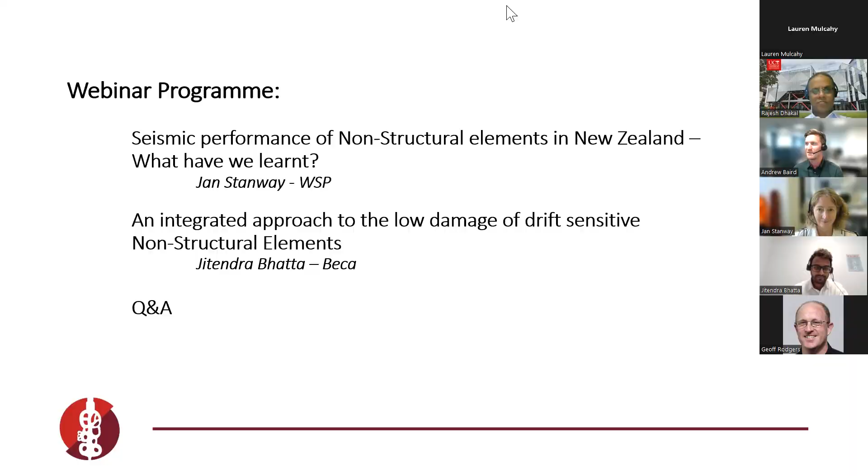My presentation today is on seismic performance of non-structural elements and what we've learned. I want to run through briefly why the seismic performance of non-structural elements is important, what were the main causes of damage, and what are the key issues facing the construction industry that impact this. I also want to talk about the impact of the performance of the primary structure on non-structural elements, and what can be done to improve their seismic performance.

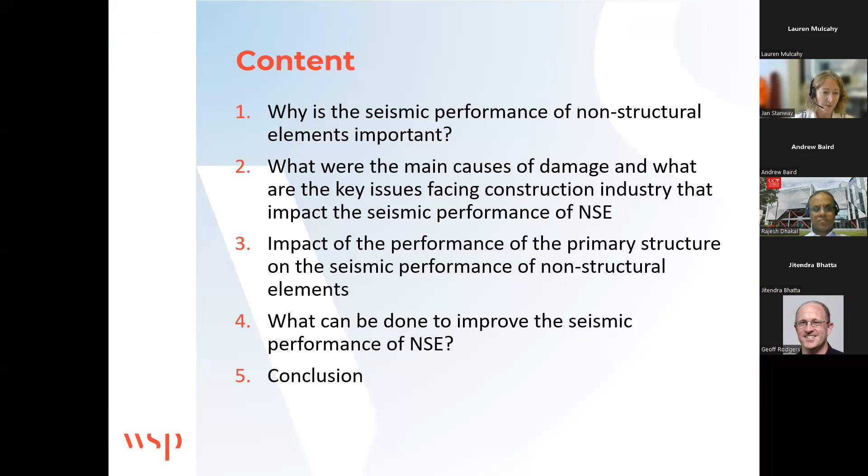So starting out, why is it important to have good seismic performance of non-structural elements? Well, non-structural elements typically contribute to about 80% of the total cost of the building. And we had extensive damage to non-structural elements in the Canterbury earthquakes, the Cook Strait earthquake up in Wellington where accelerations weren't as high, and the Kaikoura earthquake.

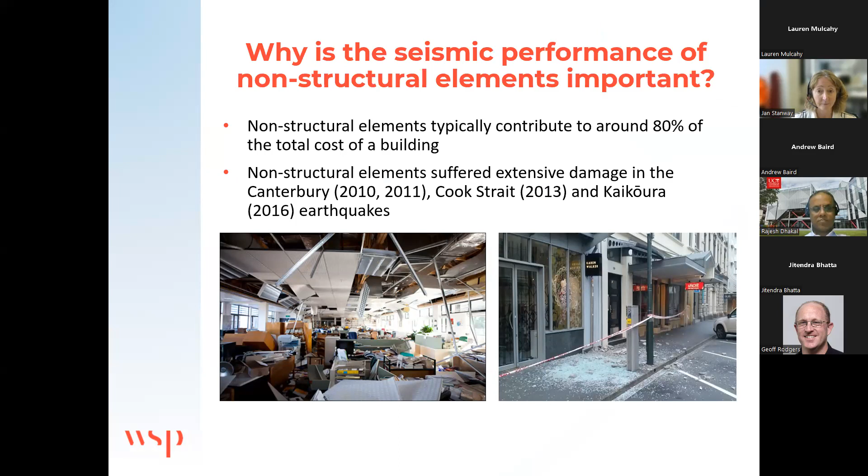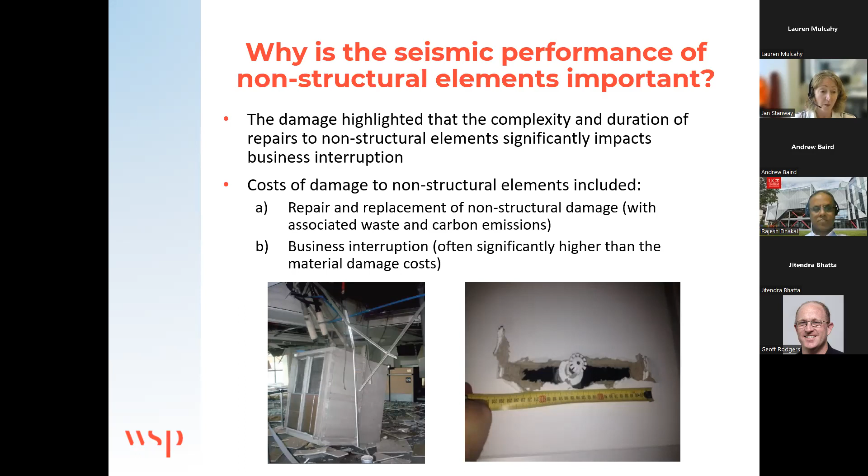The damage we observed highlighted that the complexity and duration of repairs to non-structural elements significantly impacts business interruption. The costs of damage are twofold: firstly the repair and replacement of non-structural elements, but importantly business interruption can't be forgotten, because in most cases it was actually a significantly higher cost than the material damage costs, where businesses couldn't go back to their offices immediately or had to remove themselves to enable the repair or replacement to be undertaken.

Did I zoom past? Sorry.

So what have we learned? That good seismic performance of non-structural elements is important, but not just for our hospitals and post-disaster facilities. It's important for our homes, our apartment buildings, our office buildings, our industrial buildings, and our transportation links, because the ongoing operation of those buildings is essential for the continuation of our economy and the well-being of our communities.

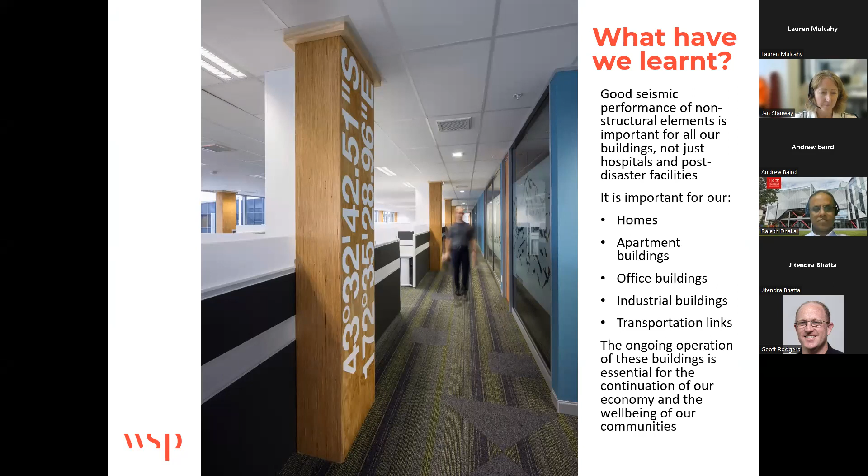So what were the main causes of damage and the key issues facing the construction industry?

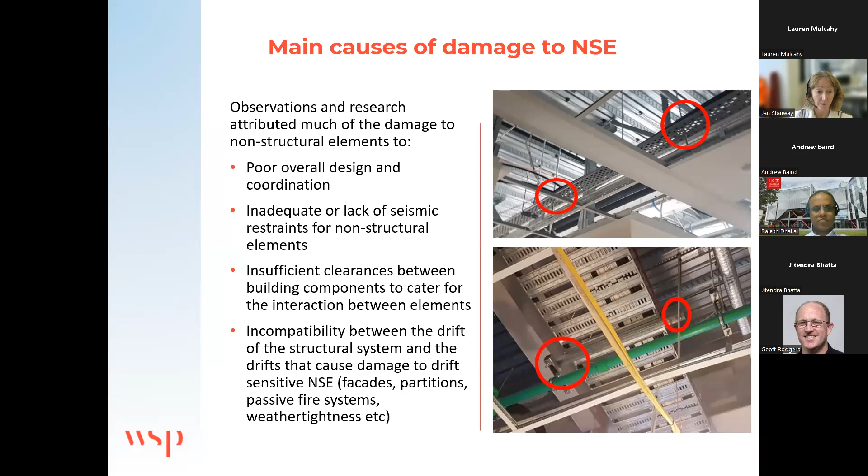The main causes of damage were poor overall design and coordination. We saw a lot of places where there was inadequate or lack of seismic restraints for non-structural elements, insufficient clearances between building components to cater for interaction between components, and incompatibility between the drift of the structural system and the drifts that cause damage to drift-sensitive non-structural elements—your facades, cladding, partitions, your fire systems, your passive fire systems, and your weather tightness.

The Building Industry Partnership did some research back in 2020 and found there were underlying construction industry issues causing the poor performance observed during the earthquakes. The key issues were found to be procurement, where procurement methodologies push the risk down the chain to the contracting teams, and that risk is then poorly managed throughout the project lifecycle.

We found there were limitations in knowledge, particularly among clients, about what they were going to get if they chose code minimum performance compared with resilient options. We found poor holistic design and coordination between the design disciplines from the start of projects, poor coordination between subtrades on site, and installation behaviours driven by lowest price conforming tender processes, resulting in poor outcomes.

We also found there's a lack of knowledge, skills, and training throughout the industry. And last, but certainly not least, there was a lack of independent QA.

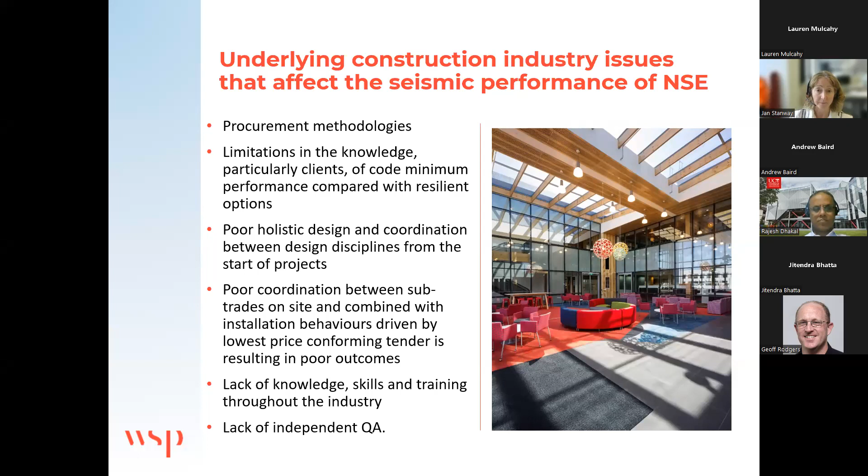So I want to talk briefly about the performance of the primary structure and its effects on non-structural elements. From the concept phase, the design of the primary structure should be completed to achieve the drift limits required for the performance of the non-structural elements. I've made some notes on things that should be considered by structural engineers.

They should be thinking about what's in this building. Are there partitions? Are the partitions full height, or do they stop at ceiling level? Do I have firewall partitions? If so, is the intent that they run from floor to floor, or to the underside of the roof? Or is there an intention to have fire rated partitions run just above ceiling level, with a bulkhead and fire rated seal coming down from the top to create the firewall? In each case, what detailing will be required, and what costs will be required?

Noting that damage to partitions can initiate at around 0.3% drift.

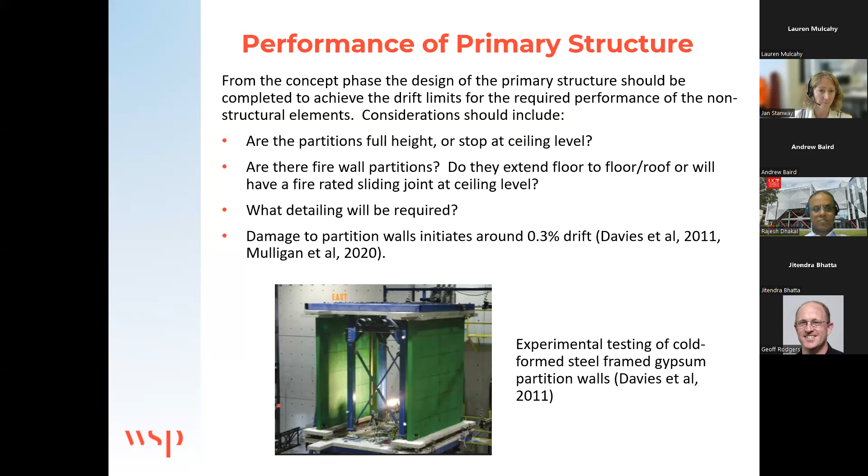Also to be asking, what's the cladding system? And for that cladding system, what's the drift limit for the initiation of damage to the proposed cladding system? Some work done at the University of Canterbury by Arifin and others in 2020 was on a commercial glazing system, and found that you can start to lose water tightness at a median drift of 0.35%.

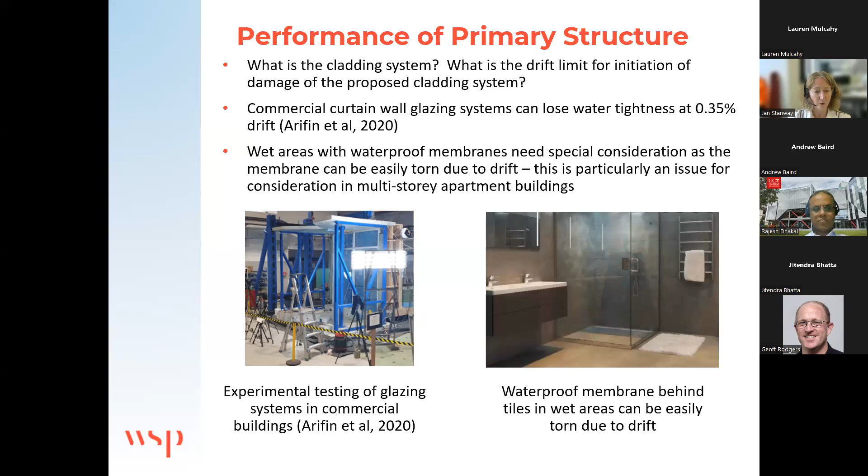When you've got multi-story apartment buildings, you often have tiled wet area showers with membranes in behind. That's particularly an issue for drift, where in the corners, the membranes are actually very vulnerable to being torn under drift.

My key point here is that the design of the primary structural system needs to achieve the seismic performance of the non-structural elements. When it's holistically considered, the most cost-effective overall solution will be found. Let's not design the structural system and then get way down the track to find we've got to implement expensive detailing on our non-structural elements to get the performance we need, and overall we haven't necessarily found the most cost-effective solution. I'm really advocating for holistic consideration from the start of the project.

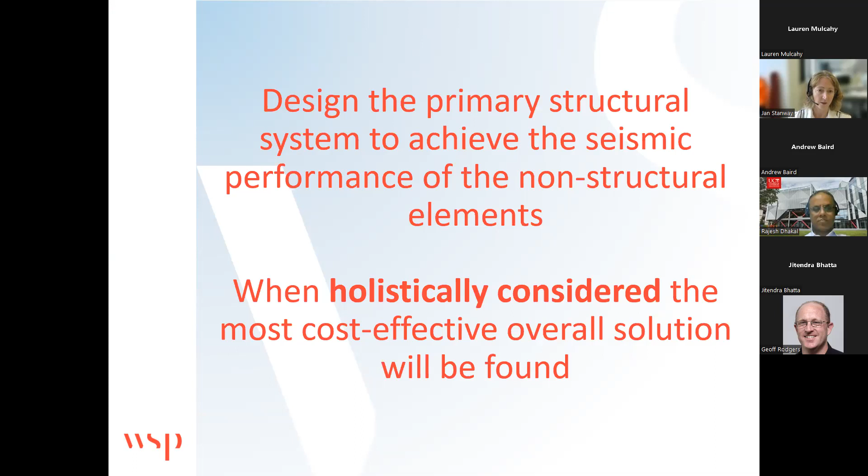Other things to be considered with the structural design are often lightweight roofs, which in standard is good value to have cold form purlins supported on optimized steel rafters and portal frames. However, it needs to be discussed with the building services team if there are going to be plant and equipment suspended from the roof or loaded onto it, and what gravity and seismic loads the roof will need to resist. We don't want to get into a situation where down the track they then need to install secondary structure, which often ends up costing more money and potentially causing not just budget overruns but program overruns.

Also to be looking at the floor system, and does it have sufficient capacity for those localized hold downs for plant and mechanical and electrical equipment? Also just thinking about larger sized filled water pipes, which have considerable weight - where are those components going to be resisted to, and where's the restraint going to come from? Just thinking through those collaboratively so that solutions are being chosen and thought about during the design.

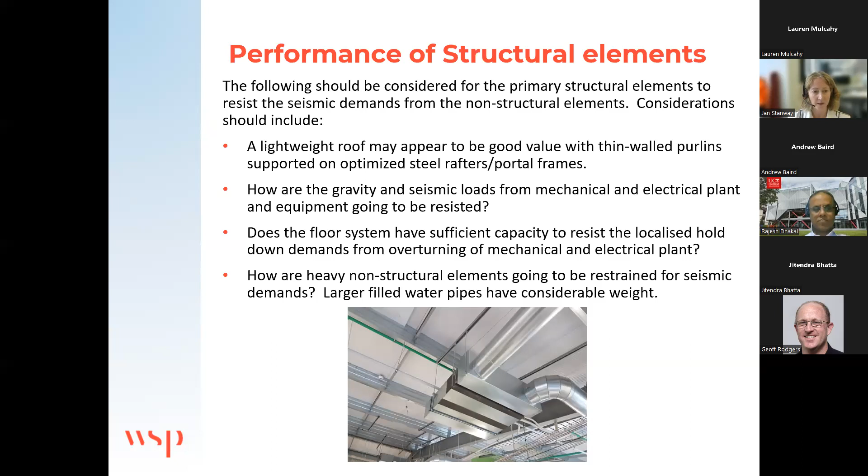Also briefly, I want to talk about consideration of the post-earthquake performance. This isn't just to be considered when you're doing post-earthquake inspections, but when you're doing the design, to be thinking about in an event that's not a ULS event, what do I want my post-earthquake performance to look like?

Just to note that structural damage can materially reduce the stiffness of structures. Reduced stiffness equals increased drift. So we need to be thinking about whether the drift-sensitive non-structural elements are going to be more vulnerable to damage in future earthquakes. Then thinking about the repair methodology for the primary structure, that must consider the future seismic performance of the non-structural elements, not just the structural performance of the primary structure to achieve life safety.

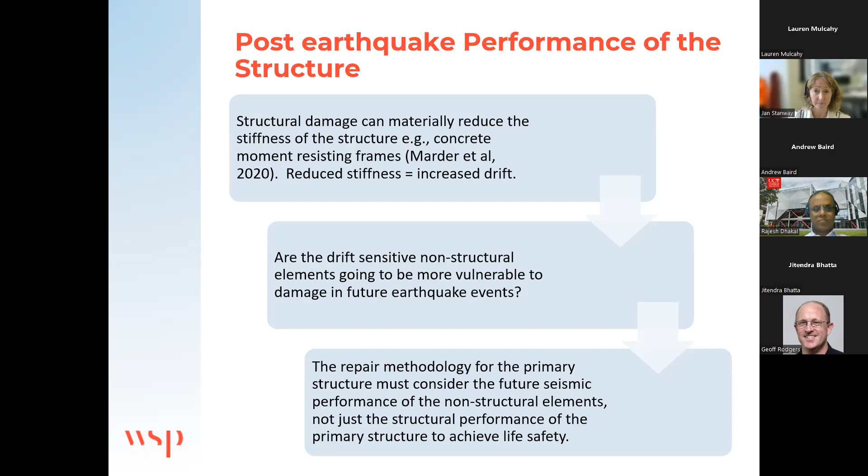I also want to briefly talk about residual drift, where residual drift of the primary structure can actually cause or present some unique challenges for restoring earthquake damaged buildings. Here I've got a window which you can see, and you probably can't see, but there's a 0.5% drift on this particular building, and it's meant that there's a gap between the frame and the window, so air can come into that particular room.

Not only that, the actual frame has been damaged, and there's water ingress, so there's water tightness issues. Not only that, there was damage to the plaster cladding, so replacement of the cladding in the window system needed to be undertaken. However, because the building's got a 0.5% drift, if you tried to install new windows into the window frame, which has now got 0.5% drift, you're likely going to get the same issue where your windows are going to have gaps, and you're potentially going to damage your windows by putting them in in the first place.

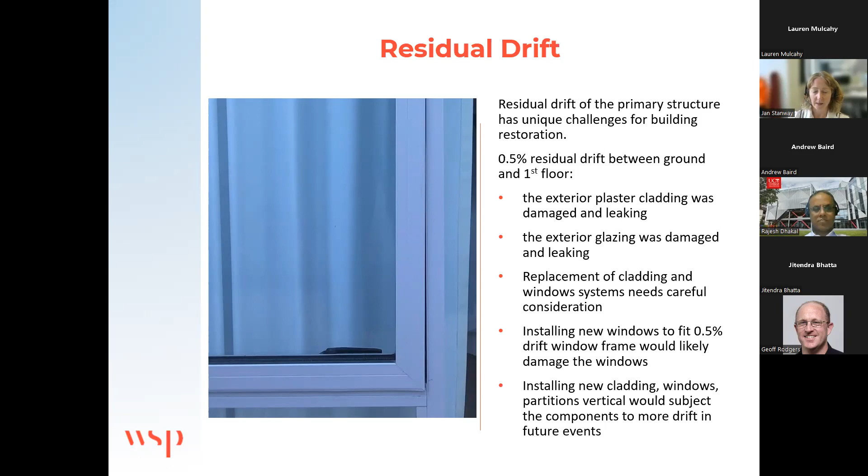Of course, the perhaps suggested option would be to install the windows, new cladding, and new partitions vertical. However, you just got to be mindful that at the moment it's sitting at 0.5% drift. And if the building moves the other way to 0.5% drift, if the non-structural elements had been in their original form, they would have only seen 0.5% drift in the other direction. However, these new components being put in would have seen 1% drift, which makes them significantly more vulnerable to damage in future events.

So I just want to go into a section on what can be done to improve the seismic performance of non-structural elements.

As I've mentioned, I really want to highlight holistic building design and coordination across all of the design disciplines, and that following through into the construction phase, so that the primary structure is designed to achieve the seismic performance of the non-structural elements, in particular the drift-sensitive ones—your partitions, firewalls, and cladding systems.

In some cases you're going to have design build for non-structural elements, and that's fine. However, the design team must work together to solve the challenges during the design phase to make sure there's sufficient room within the context of the building for the final design and coordination of the components by the contractor during the construction phase.

Also, I want to put it out there as an option to potentially consider modularization. Can the in-ceiling services be modularized and constructed off-site with structural support frames, such that the completed sections can be brought to site and fixed to the building?

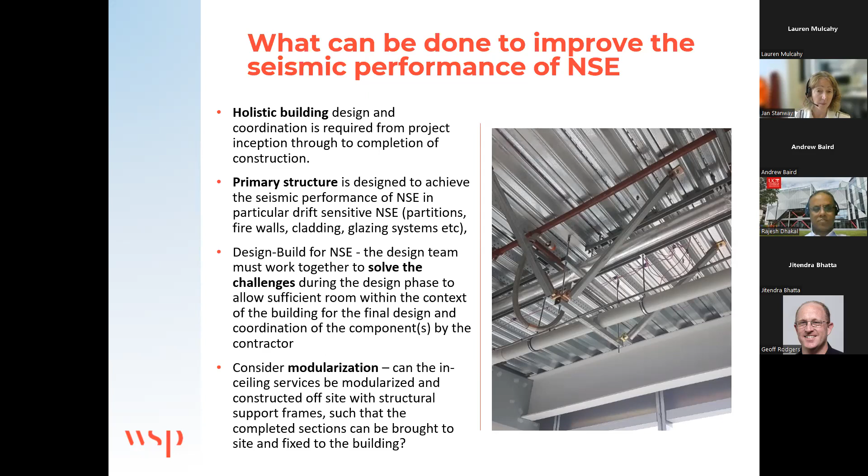I recommend one entity is given the responsibility for the installation and on-site coordination. So they're not doing all the installation, but they've got responsibility for the on-site coordination of all the non-structural elements, including particularly those in the ceiling void—your ceiling hangers, building services, and seismic restraints for all of those, including any restraints for your partitions.

You want to ensure sufficient coordination has been done in the design phase, and when the contractor comes through and does their overlay for any design build components, such that if the contractor provides or suggests product substitutions, they can be well considered before approval is given.

I'm aware of many instances where it appears a significant saving is available. However, the knock-on effects are not well known, such that you actually end up with budget and program overruns from approving a particular product substitution, because there wasn't sufficient coordination done—it wasn't foreseen that this was going to be an issue.

And last, but definitely not least, independent inspection and QA sign-off—if we can get that to confirm that the installation is not only code compliant, but actually meets the performance expectations for the project.

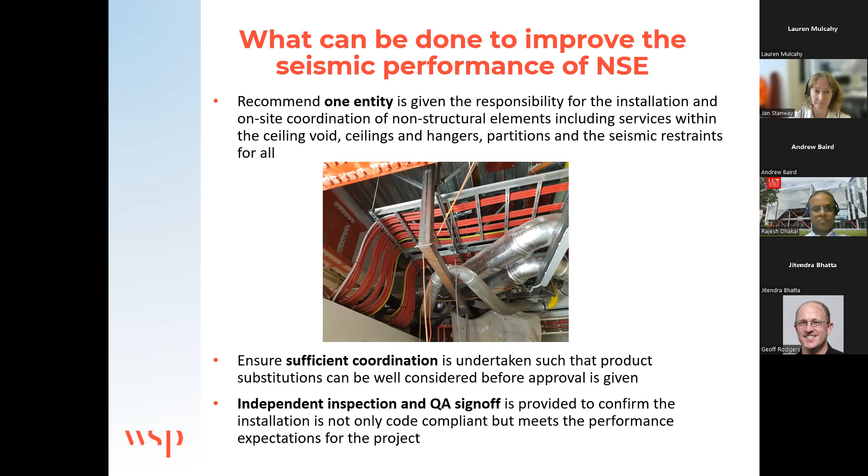Just got a few more slides here to highlight some specific areas for consideration during the design.

Choose an appropriate ceiling void depth. Don't skimp, because if you have too small a ceiling void, it can make the restraint services installation and the restraint installation complex and challenging. However, be very wary of large ceiling voids too, because they have their own complexities and difficulties.

When using metal deck concrete floor slabs, be aware how many partitions and firewalls you've got, because the trapezoidal profile you can see on the left can actually be really challenging and expensive for the contractor to connect to and seal firewalls to. Potentially, if you've got lots of partitions, having a flat soffit profile deck may be a good alternative.

You want to ensure you're using seismically qualified post-installed anchors, and be mindful that there are a number of anchors with limitations on their use in the soffit of metal deck concrete floors.

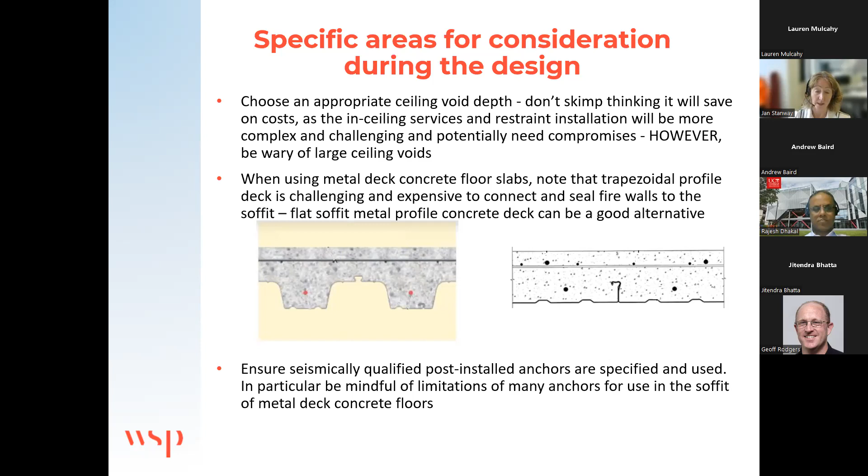You want to specify and use seismically rated acoustic vibration mounts for plant. The next consideration is thermal expansion of heating pipes, hot water pipes, steam pipes, and chilled water pipes. Need to make sure that any seismic restraints being designed and installed do not compromise the thermal expansion requirements—we don't want to compromise the functionality that's going on day in, day out by virtue of putting on seismic restraints.

We want to ensure that hanging points for anything we're putting on are actually certified for the restraint loads that are expected. Just to note, folded sheet metal ducts are often fabricated from very thin sheet metal.

You want to be coordinating fire dampers and firewalls, the penetrations through your partitions, with the fire engineers and the building services team, and potentially the architect as well. Fire dampers are installed in the wall, and the duct going through is hung from the slab above.

You need to make sure there's compatibility of movement between the duct and the partition wall drift, so the duct does not prevent any breakaway. Also make sure that any restraints you put in adjacent to the breakaway joint don't stop the breakaway joint from doing its job in a fire and actually breaking away.

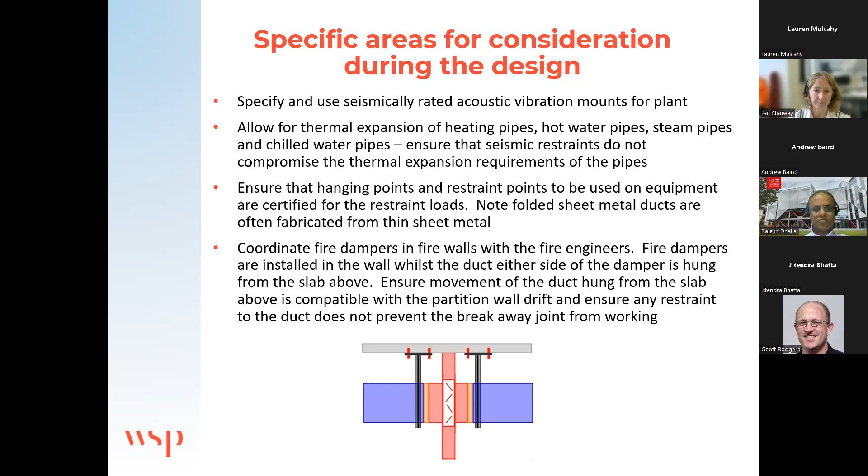You want to have appropriate flexible connections on mechanical plant and use flexible sprinkler droppers. And the last point, you want to coordinate with a fire engineer for passive fire elements, and also talk to the architects as well.

Currently there's a lack of testing to validate the post-earthquake performance of a lot of passive fire systems. Some fire stop systems inherently have good fire stop performance in a seismic event because they're already seismically isolated or restrained as part of normal design. But please, if you're doing any work in this space, make sure you coordinate really well with the fire engineer and architect.

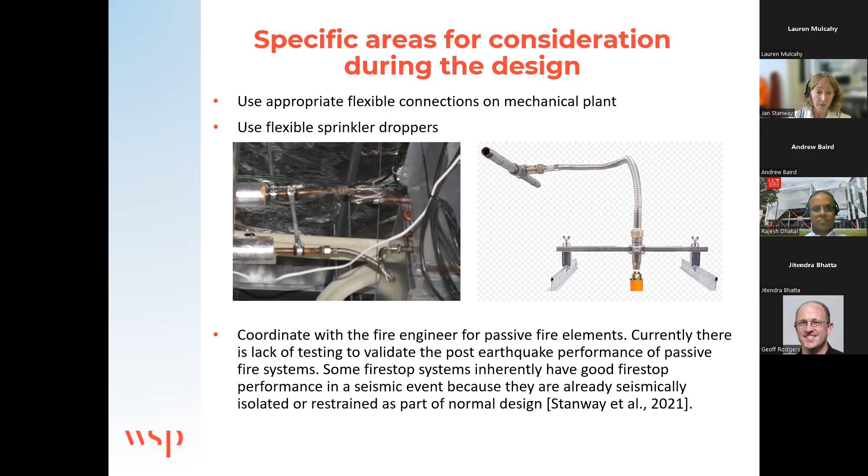Moving into the conclusion, I really want to highlight holistic building design. I'm not advocating for a checklist, that if you do these 5 things you're going to do great. Every project is specific, every project's different. You need to take each project on its merits and holistically think about the functionality, what's in the building, and work closely with all design disciplines, with that coordination following through to the main contractor and subcontractor.

If we can get that, we're going to have a significant impact on improving the seismic performance of non-structural elements. So finally, improving the seismic performance of non-structural elements is going to reduce the need to close buildings following earthquakes, and to close them to enable repairs to be completed.

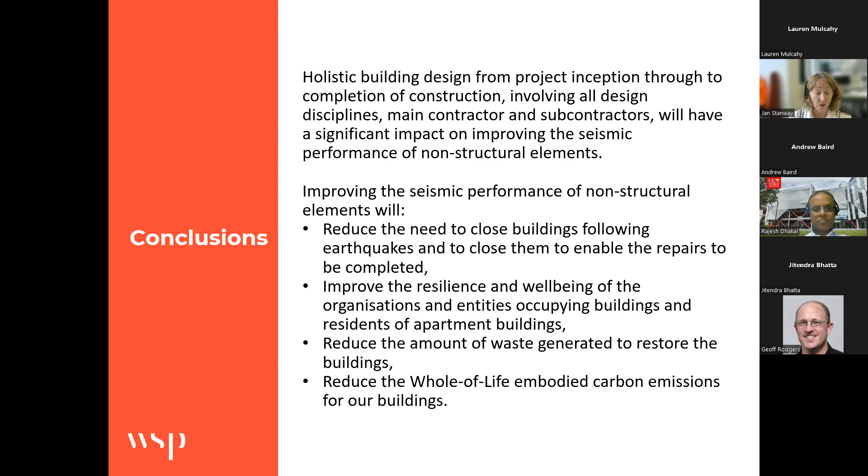We're going to improve the resilience and well-being of our organisations and entities occupying the buildings, and residents of apartment buildings. We're going to be able to reduce the amount of waste generated to restore the buildings, and as a consequence, reduce our whole of life embodied carbon emissions for our buildings. Thank you very much.

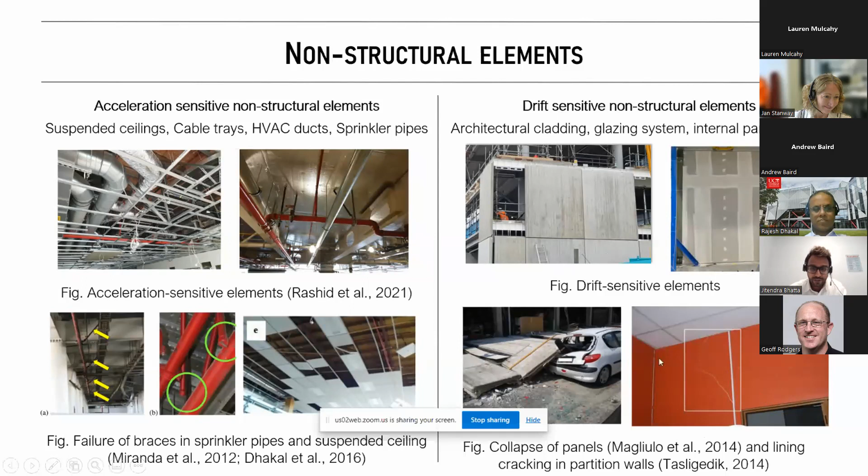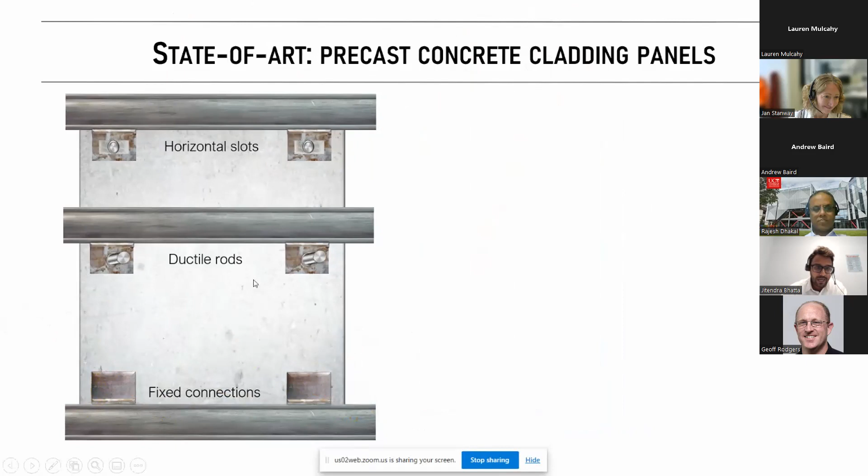First of all, the general connection details for precast cladding panels: they are attached to the structure either using horizontal slots or ductile rods. The bottom connections are fixed or welded to the structure such that relative displacements between the panel and the structure are taken by the sliding of bolts in the slots and the flexing of the ductile rods. Another important aspect of these panels is the joint between them, which is generally interposed by sealant.

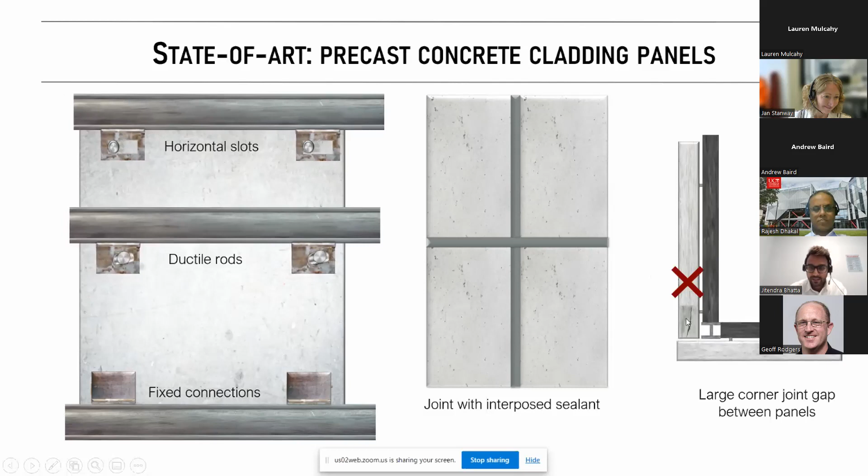In these traditional systems, we do have a large corner gap between panels, such that collision between panels meeting at a building edge is avoided.

Similarly, there has been a lot of literature and research recommending partition walls have vertical joints between the vertical structure elements or return walls, and allowing the wall to slide with respect to the floor above, such that interaction between the wall and the structure is avoided until the gaps are engaged.

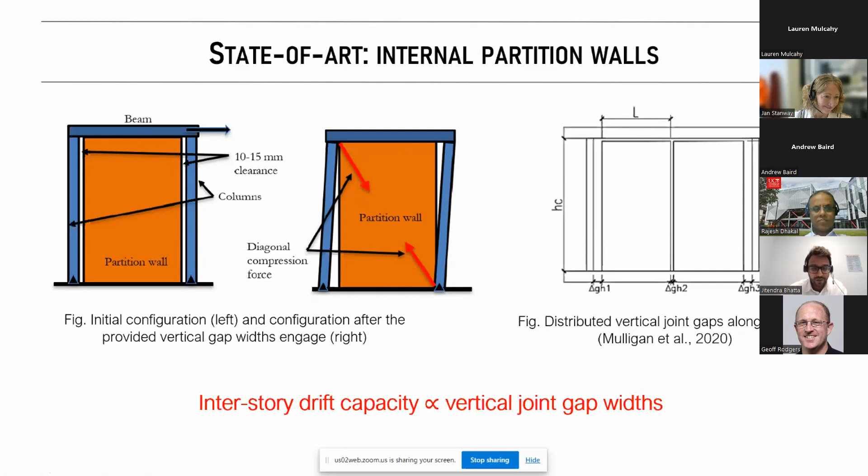Mulligan and others have tested some walls with these gaps distributed along the wall. You can observe that the inter-story drift capacity is directly proportional to the vertical joint gap width. So if we require a high drift capacity, we would also require a larger joint gap.

Potential consequences of the damage would be economic loss due to repairs, interruption and downtime, and there can be a life safety hazard due to collapse of heavy panels.

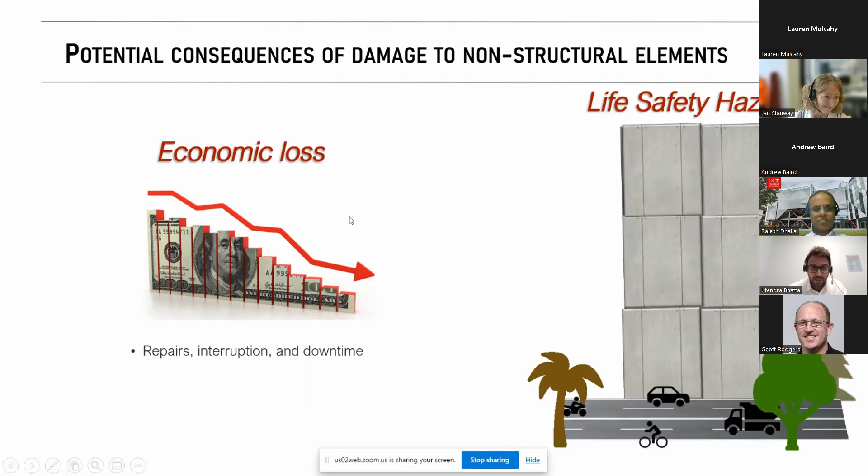So for my PhD, there were two main research questions. One was regarding the precast cladding panels, to ensure a low damage performance while reducing the vertical joint gap between the panels at the corner to make it aesthetically better. The other was regarding internal partition walls, where the research was around providing a minimal vertical joint gap between the wall and the boundary elements, and also providing a low damage seismic performance.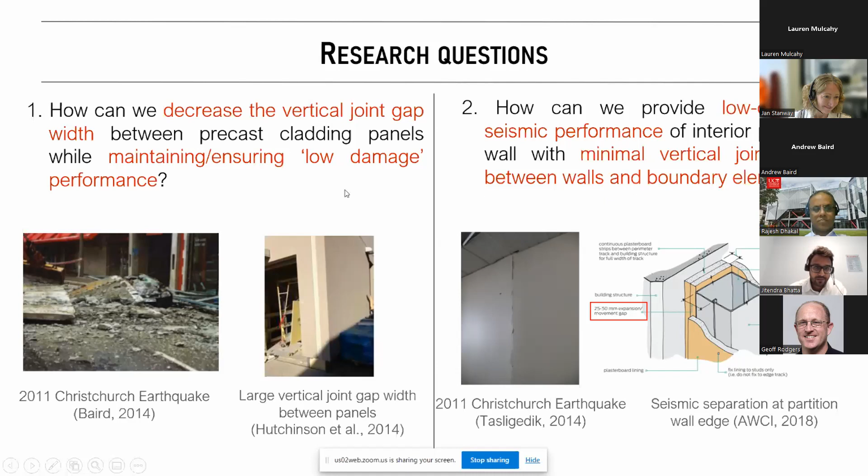First, I would like to talk about the precast cladding panels. This was a detail we came up with during my PhD research. You can see on the left here a panel with four steel embeds with vertical slots, where a bolt in the slot slides, and this slot is filled with grease to allow less friction to be developed.

These bolts are connected to the structure with angles connected to them having a horizontal slot to provide some tolerance. We can add shims to provide out-of-plane tolerance, and vertical tolerance is provided by adding packers underneath the panel. There are also weld plates cast in the panels, which resist the gravity loads from the panels.

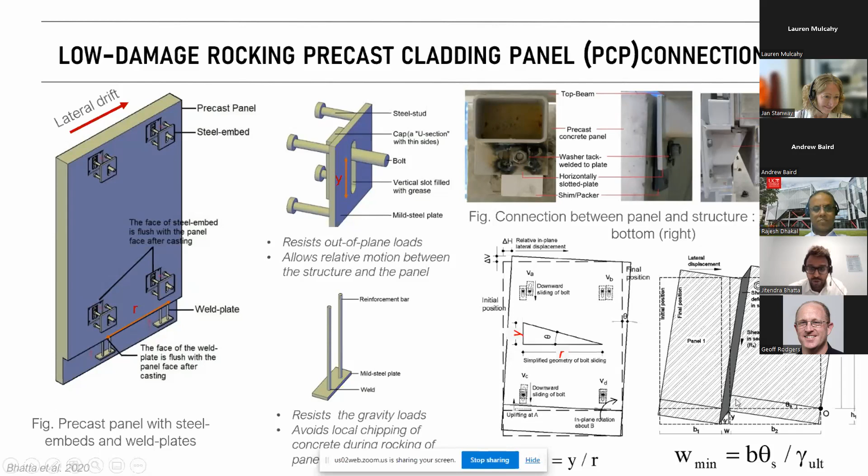During an earthquake or lateral drift, we expect the panel to rock about one of the weld plates. The drift capacity is given by a simple ratio of the available slot divided by the lever arm. We can also design the joint width between the panels based on the sealant properties and the geometry of the panels.

The first test we conducted was on a pair of panels placed on one side of the structure, in line with the direction of loading. We applied quasi-static cyclic loading up to 4% drift, and you can see here that the panels are rocking. The only damage observed was the tear in the sealant.

This one is classified as damage state 1, with slight tear in the sealant occurring at 2% drift. This is damage state 2, where the entire sealant length was torn at 2.70% drift. There was some frictional resistance occurring between the bolt and the slot, but no visible damage to the panels or their connection.

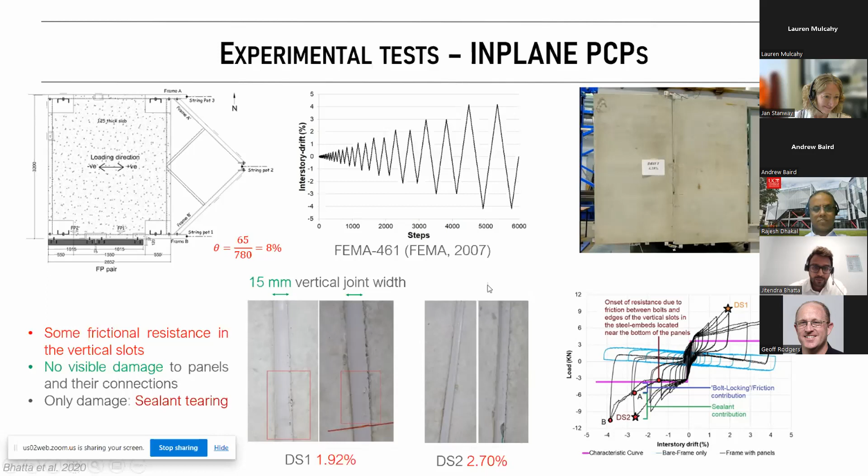The other test was on a pair of panels. Here you can see there are three pairs of panels in line with the loading direction and at a certain angle, and there was one at the back at the right angle. You can see the panels are rocking.

We also tested 2x2 grid panels by introducing a secondary beam at the mid height of the columns, to investigate the horizontal joints and the vertical joints.

These panels also proved to be seismically resilient, but there were some issues observed, such as rotation of the nut during the rocking motion of the panels. This could be solved by introducing a lock nut. We also observed sealant debonding occurring at junctions of these panels, and you can see the growth of that sealant here.

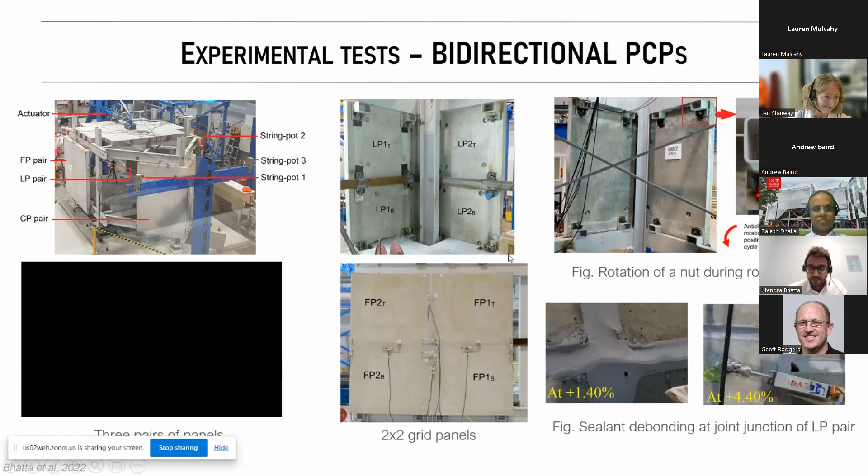The main findings were that the panels with the rocking connection could be damage free until their design drift. They also avoid larger joint gap widths, and friction develops, but the initiation can be designed. Sealants are also susceptible to tearing and debonding, though loosening of nuts was observed.

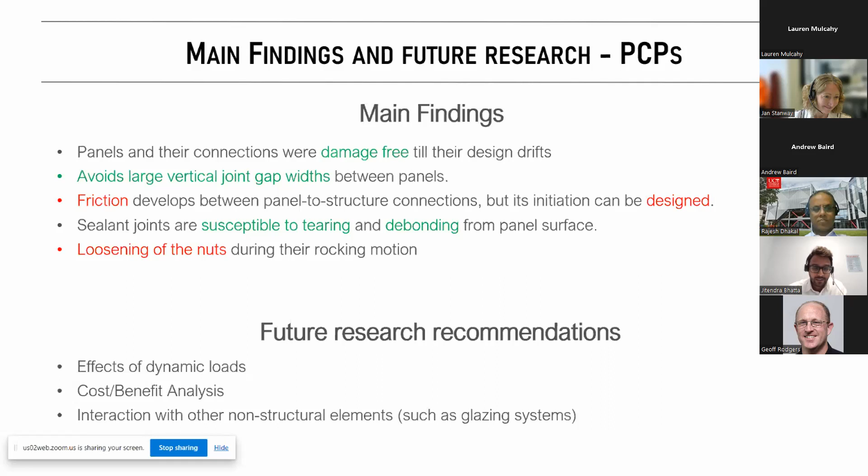Further future research recommendations would be to look at the effects of dynamic loads on these panels, to check the cost benefit analysis for construction and installation, and also to investigate their interaction with non-structural elements.

Now I'd like to move into the internal partition walls. The first test we did was on a typical traditional rigid timber framed wall, where all the studs and top and bottom plates were rigidly connected together in a Y-shaped plan, so we could observe the behavior of the junctions as well.

We subjected this wall to quasi-static cyclic loading as well. You can see here that it failed under a brittle failure mode. The first hairline crack was observed at the junctions at lower than 0.1% drift, and the second damage state was significant screw failures that occurred at the bottom and top plates.

When you compare this behavior with the partition walls tested by Mulligan and others in a similar configuration, having 22 millimeter vertical joint gap, we can see the first damage occurred at 0.67% drift. So having some kind of seismic gaps can avoid premature damage to the walls.

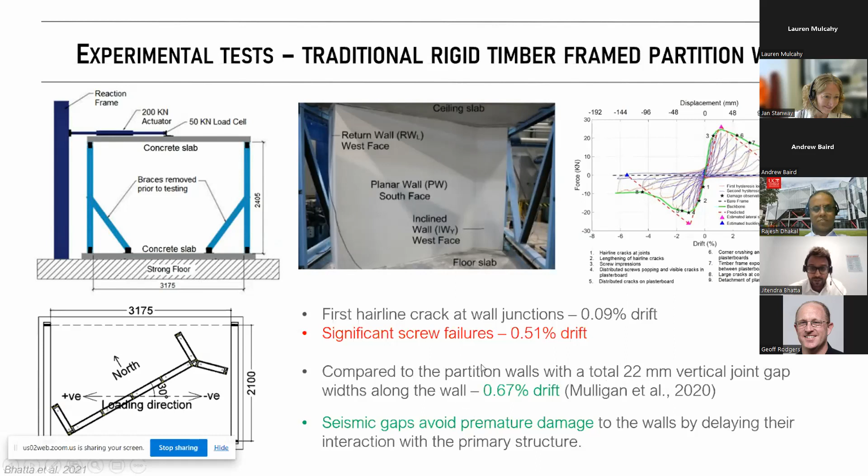Some tests were conducted on partition walls with slots in the head tracks to accommodate the in-plane interstory drifts, and having a flexibracket to also accommodate the out-of-plane drift as well. You can see here the flexibility of the flexibracket.

We tested these walls in Y and T shape. You can see here this line representing the bolt connection, the anchor connection between the head track and the floor above. You can see the wall is staying straight, and the roof is sliding.

The problem with these connections was that we observed some warping of the slots, which started at 0.16% drift, continuing to 1.06% drift. But this was kind of concealed within the wall. The test we conducted on the flexibracket is shown here.

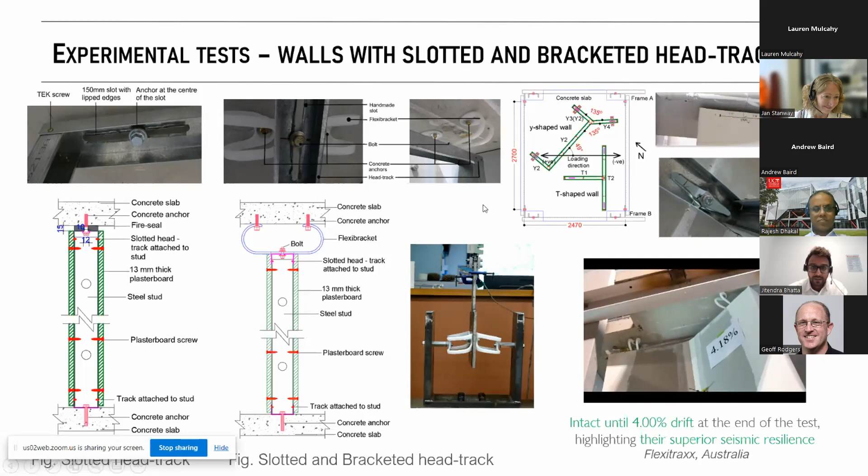The wall remained intact till 4% drift. These provided superior seismic resilience, but more research has to be done regarding the fire rating performance and acoustic performance of these walls. The other innovative idea, of rocking interpartition walls, is described here.

We came up with box studs with timber planks attached at the bottom and top to increase their bending strength. These box studs are placed at the ends of the wall, and we have aluminum angles connected at the top and bottom of the wall, such that the force from the roof is transferred to the stud to initiate the rocking motion. This is the double track, where we have two tracks, one inside the other.

The flanges of the internal track were made longer to assist with the placement of the plasterboard, and the vertical allowance, the gap here, accommodated the interstory drift. The general simple interstory drift capacity was given by the ratio of the vertical allowance to the length of the wall, if we go with a plaster joint, which is rigid.

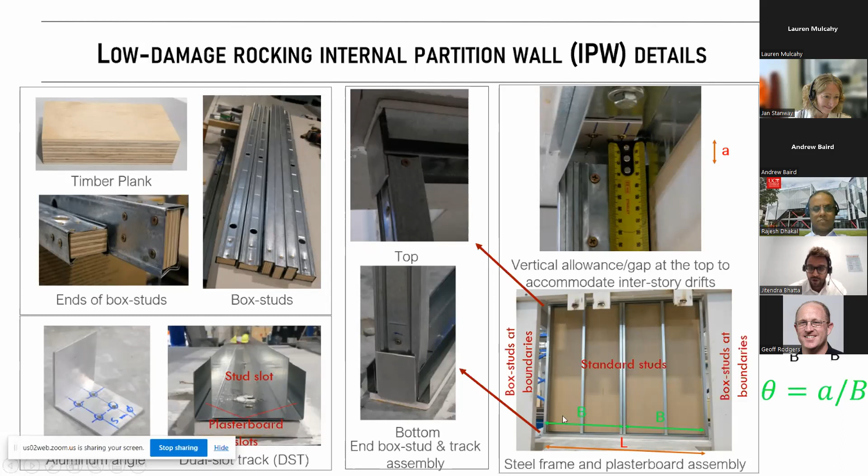But if we introduce a flexible joint here, then the capacity is given by the ratio of the gap to the wall section width. You can see here a schematic diagram with the allowance given at the top, and you can see the walls are rocking.

We tested 3 walls in planar configuration. Two of these walls have box studs at the ends, and they had plastered joints, but in this one we had only standard studs with a sealant joint.

The design drift capacity evaluated for these walls was 0.72%, but we observed screw failures at 1% drift, and the additional drift was attributed to the slackness between the aluminum angles and the steel studs. For the wall with standard stud and sealant joint, the capacity was evaluated to be larger than this, but we observed failure earlier.

This was attributed to the bending of the stud because of its weak axis, because of its weak strength in the bending mode in its weak axis.

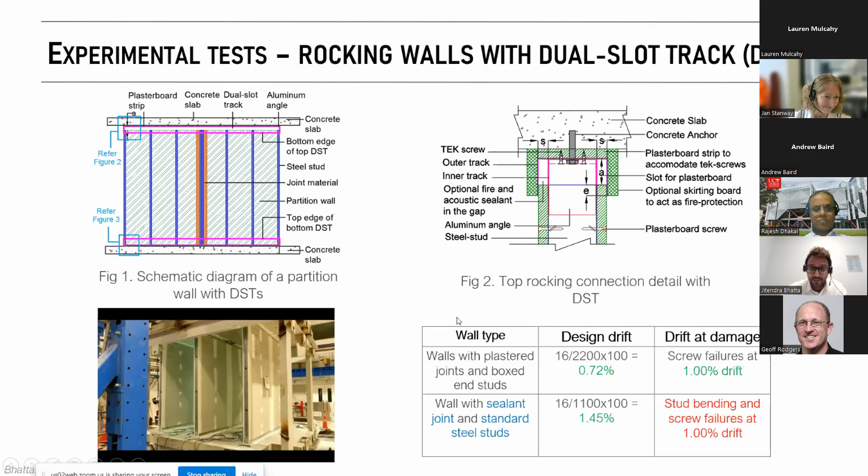We then tested a Y-shaped wall having box studs and sealant joints, which would vary from 5 to 7 millimeters. We had aluminum angles at the junctions, placed there to avoid interaction between the return wall and the in-plane wall.

The design drift capacity of the planar wall was around 1.20%, but we observed sealant debonding and screw failures early on, because there was premature yielding of the aluminum angle, which didn't have sufficient strength to rock the wall. So basically this wall was sliding.

However, if you look at the performance of these return walls which rocked, we could observe that damage occurred after 1% interstory drift.

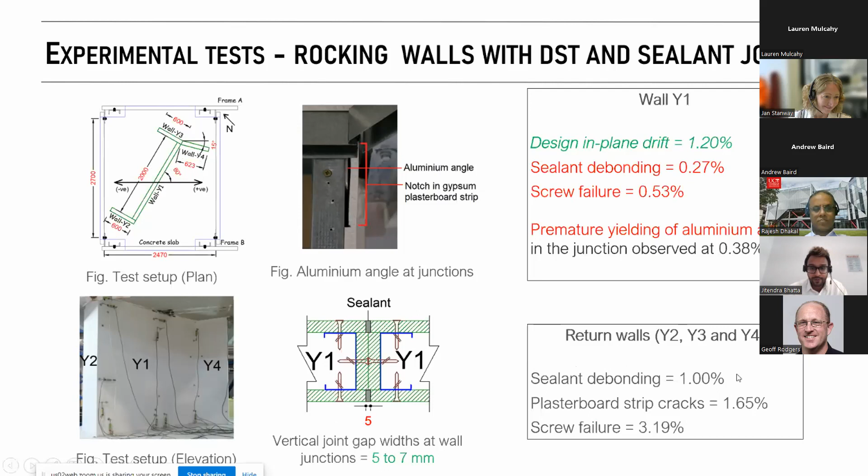The main findings of this research were that seismic gaps avoid damage to the walls. The slotted and bracketed head tracks have higher seismic resilience. The rocking walls with the dual-slot track and box end studs can accommodate the interstory drift of the design drift limit, and the multi-winged rocking wall specimen suffered from premature yielding of the aluminum angle.

Future recommendations for this research would be to check the dynamic loads on these walls, possibly with aluminum angles replaced with steel angles, to check the cost benefit of these systems, check the interaction with other non-structural elements, and look at the acoustics and fire rating performance of these walls.

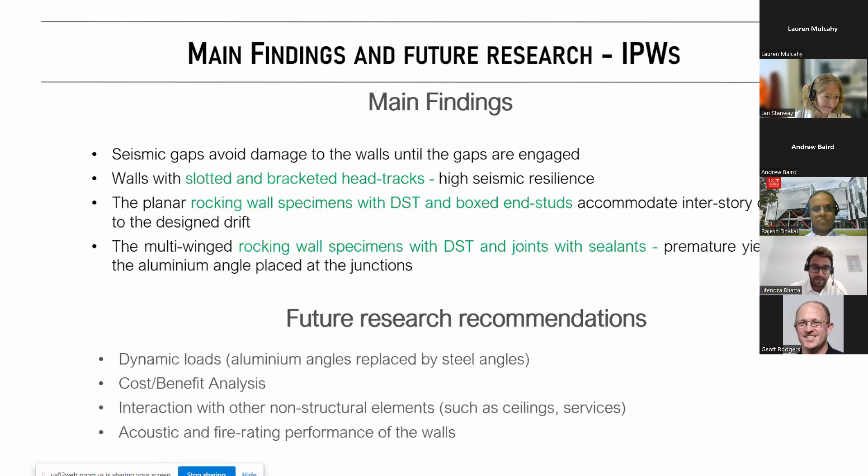So from these slides, we can see that partition walls do require to accommodate the displacement demands from the structure, and we cannot ignore that. So while implementing low damage design, we need coordination and communication between the other disciplines, because each of them has a different responsibility towards it.

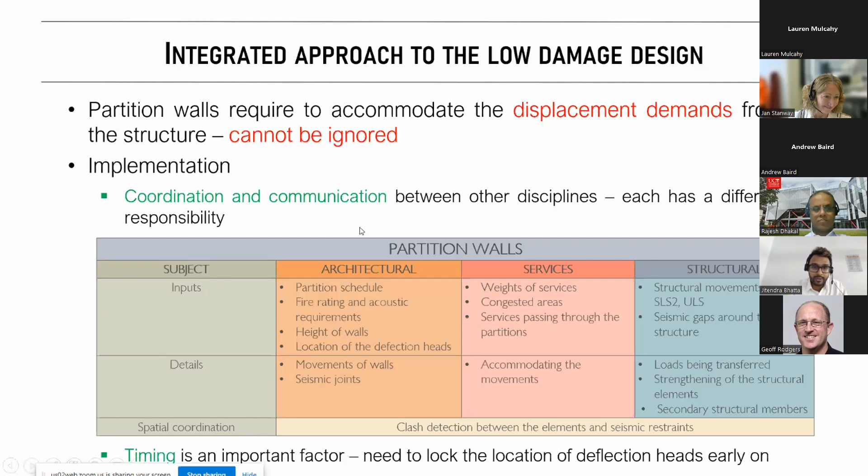If we can coordinate in regards to inputs, details, and how we are going to accommodate the movements, timing is also one of the important factors. For example, in partition walls, we need to lock in the deflection heads early on, so you can detail the restraints and do spatial coordination and clash detection between the seismic restraints and the other elements. One example to show the accommodation of the drift can be with a figure like this.

So we have services penetrating through a wall, but if you have a deflection head track here, which allows the sliding of the lower part of the wall with respect to the top part, then the services passing above the deflection head wouldn't require us to detail anything to accommodate the interstory movements. However, for the services that pass inside the walls, this would require a detail to accommodate the movements.

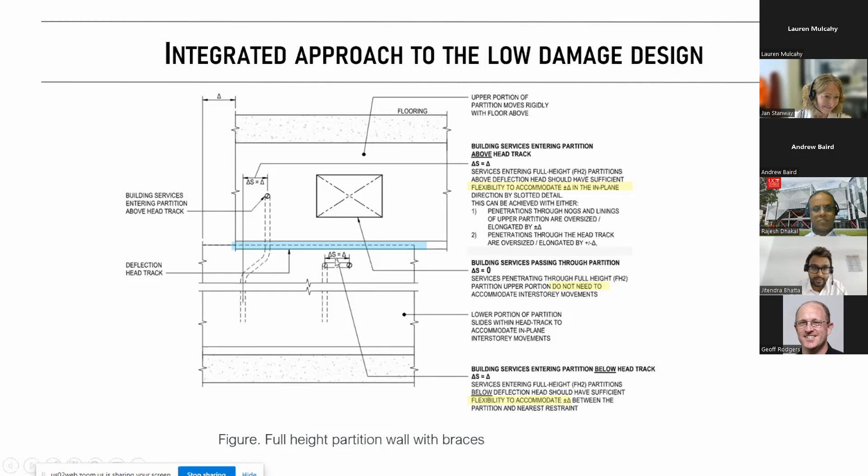So I would like to thank all the funding partners during my PhD research, and thank you.

Thank you, Jitendra, and thank you, Jan. Thank you very much for your very interesting presentation.

So we have had two really complementary presentations. Jan talked about the importance of holistic considerations in looking at issues on a project basis, dealing with each project on its merit and doing things the right way. And Jitendra introduced a few solutions around accommodating large drift demands in flexible buildings particularly, and how we can have our drift-sensitive non-structural elements detailed and designed adequately to accommodate the seismic demand from the structure.